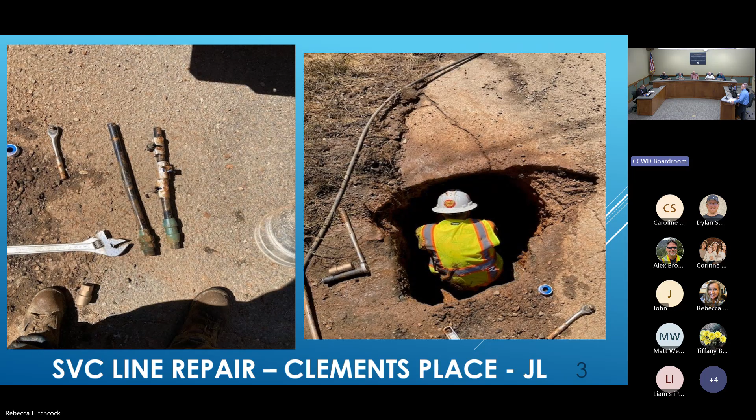You can see what they cut out in the image on the left. They actually cut out at the tap too - it was leaking at the tap. So they put a whole new tap saddle on and then run a new section of poly tube. That's what a new tap saddle looks like - you can see it on the main, the AC main there at the top of the screen. And this is kind of what the old tap looked like, just threaded right into that old AC pipe. So a lot of the time the threads, you need epoxy around the threads, will break.

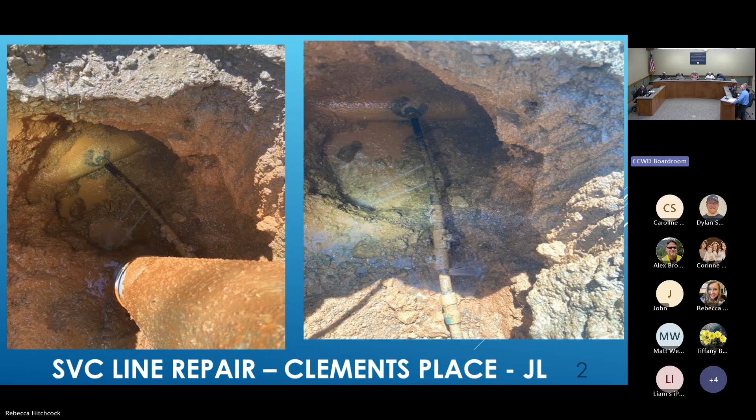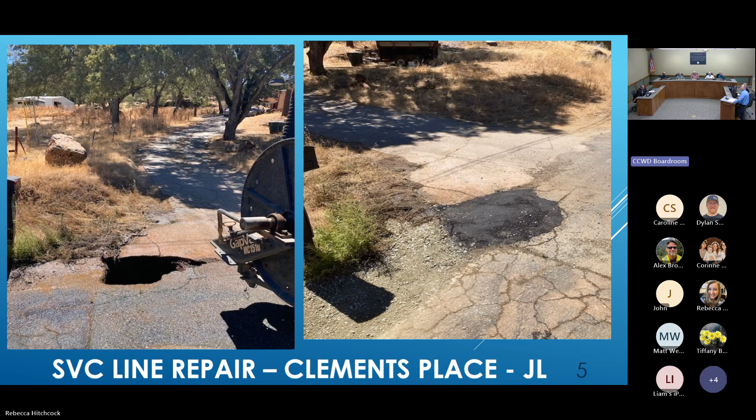So, just more of the same. I think the Jenny Lind crew had 45 repairs on mains and service lines in the month of August. You can see that's kind of the hole they're working in, in the image on the left, and then the backfill with the temporary asphalt in the image on the right.

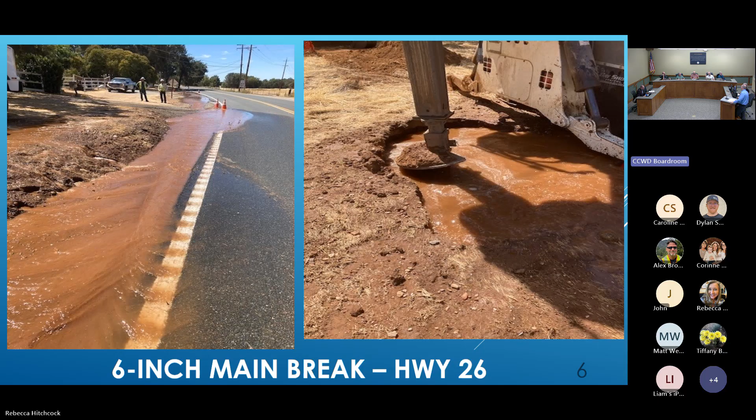This was a USA related to PG&E setting power poles off of Highway 26. Not a lot of water, but there's some - this auger bit bored into our 6-inch water main. So the challenge here is when our folks respond, is to not just completely shut that off and allow all that muddy water to flow back into the system. You really want to keep positive pressure until you can clean and expose the area and then get in there and make a repair.

So do you shut the water down a little bit? Yeah. So at the hole, where it's already kind of just boiling out, you minimize it so that you can overcome the water coming out of the hole with the vacuum truck - that's really what you want to do. So you can expose it, see what's going on, clean that area, and then put a full circle clamp, like in the image on the right, and avoid a boil water advisory.

So why would they be drilling anywhere near it? I mean, we've got good maps, and they've got metal detection. Well, we don't have good maps.

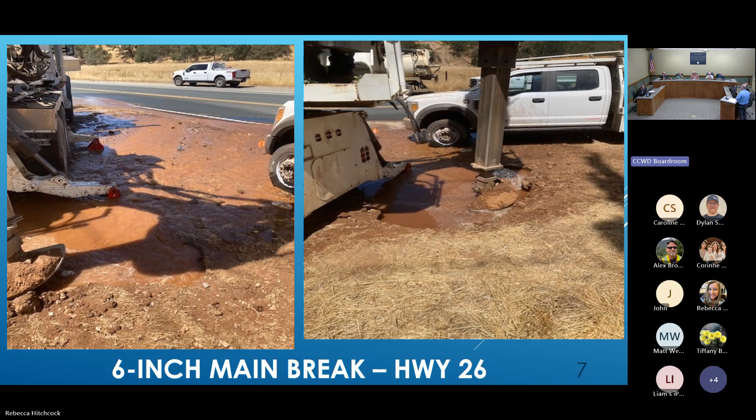Yeah, that's the challenge - it depends on the location, it could be the map, it could be a locate bust. This pipe can be very difficult to locate. This asbestos cement pipe, if it doesn't have a wire on it... I'm not sure if this was a USA locate bust on our end, but there's a lot of back and forth between PG&E and the utilities. If we mismark and tell them there's nothing right there, go ahead and dig, and if they hit it, it's on us to repair it. If we mark it and they hit it, then there's a little back and forth that goes on there.

PG&E usually has a minder on the job to help account for this work, and the ops folks here are up to speed on what happens. But there's so much work going on that invariably CCWD comes out ahead at the end of the month. At the end of the day, can you still see those marks? It depends - unless they took the asphalt out, unless it's just gone. Some of those USAs are what we call remarks - we need you to come back now, we've done a bunch of work, now we don't know where anything is anymore, can you come back and mark it again? So that'll happen.

Damon, I have a question - you call that a concrete pipe, is that what most people would refer to as transite? That is, yeah, I believe AC, some folks call that transite. But how widespread is that material used? I'd say about 75 to 80% of our systems are this pipe, AC transite, throughout the county. The rest, 20 to 25%, would be C900, plastic, PVC, ductile iron, some steel - not a lot of that left anymore.

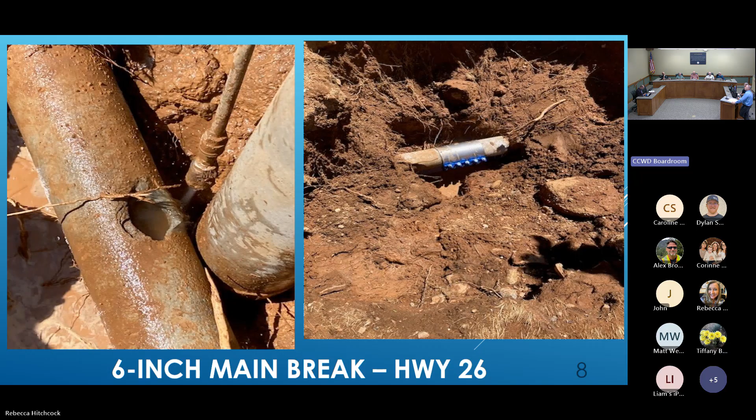So we have an earthquake here - is that stuff likely to crack and rupture in multiple places? Excellent question. I can show you, actually not even an earthquake - when the soil changes, like expansion and contraction, when the humidity or water content in soil changes, usually in springtime or fall, we'll get on AC pipe what's called a shear break. The ground will shift and it'll crack in a perfect circle around the pipe. It's a quick repair, but we usually see that when the conditions of the soil change. If you imagine an earthquake of some magnitude, we'd have a lot of breaks for sure.

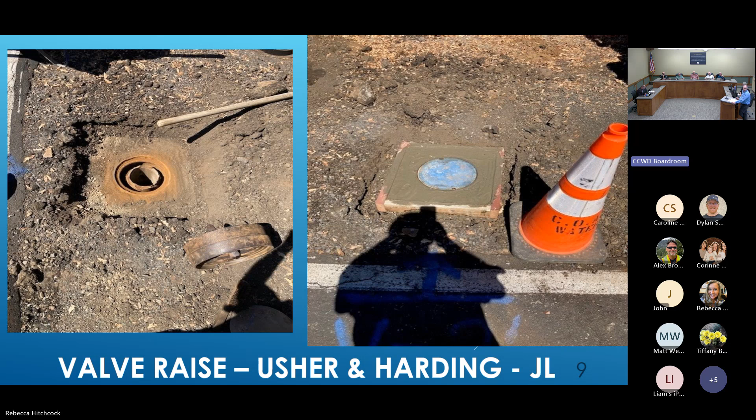Valve raise - we talk about this monthly. It's always a good idea when you find a buried valve to bring it up to grade, kind of like part of the conversation Kevin was talking about with paving. It's always a challenge when it comes to paving - if we're not on the ball and not locating our valves, and there's not a conversation about who's got the grade rings and who's got the valve lid, we will run into situations where they can be buried.

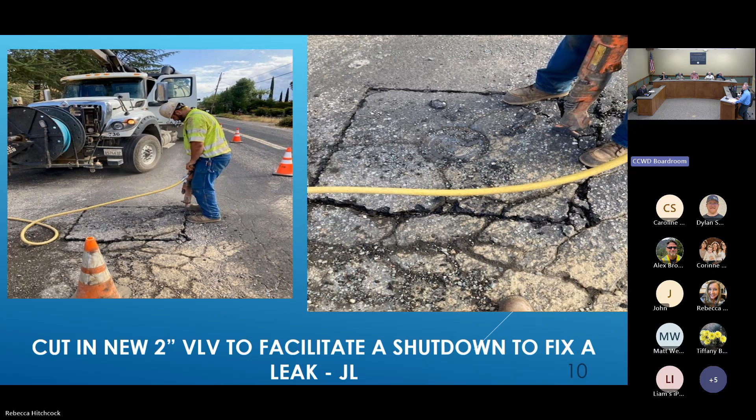This is an interesting one - we had to cut in and replace a valve so we could shut a water line off to fix a leak. So here folks are cutting into the asphalt. You can see, if there was a USA here, how - and that asphalt is in really good condition, I'm kidding - it could just disappear after the work takes place, and you have to get in there and redo the USA marks. And so here we are.

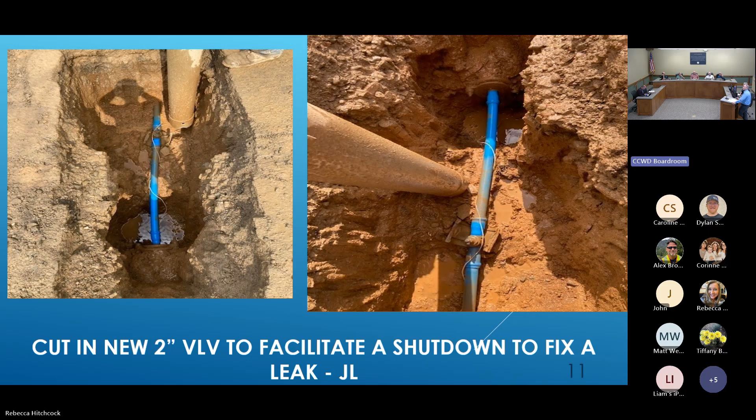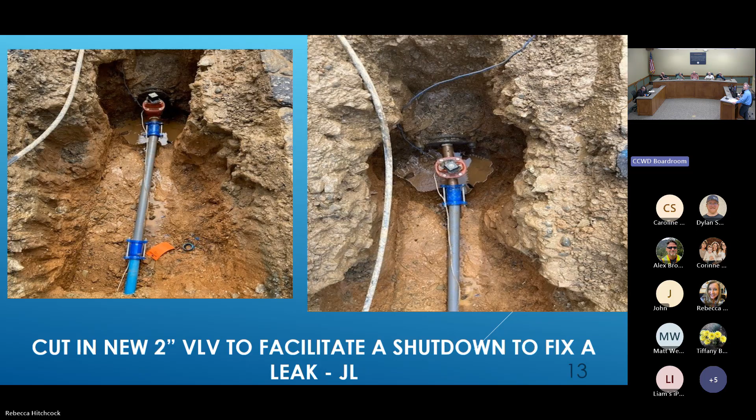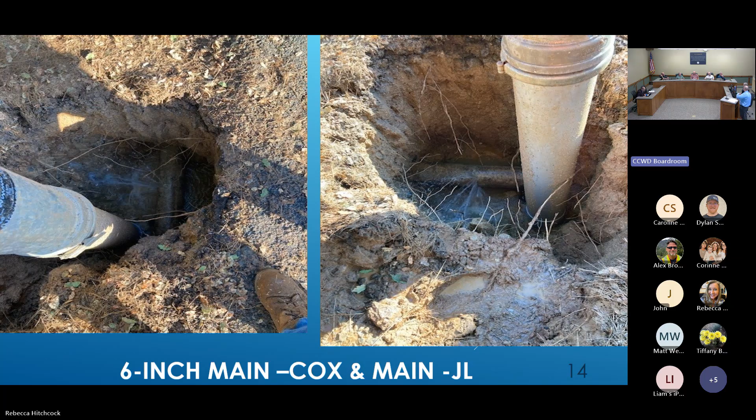So this is that shear break I was talking about - the soil just changed here and that pipe broke. In the image on the right you can see water spraying out. It's just like this perfect circle around the pipe, and usually those are repaired with a full circle clamp.

This is an interesting one. A hand dig repair on a service line going up a hill. It's kind of hard to see in the image on the left, but our operator is laying down on the embankment, pulling out old sacks of concrete that were placed on top of the service line to keep it stable, so we could then get in there and replace the service. Those are the old sacks of concrete laying at the base of the hill, so he can make the repair.

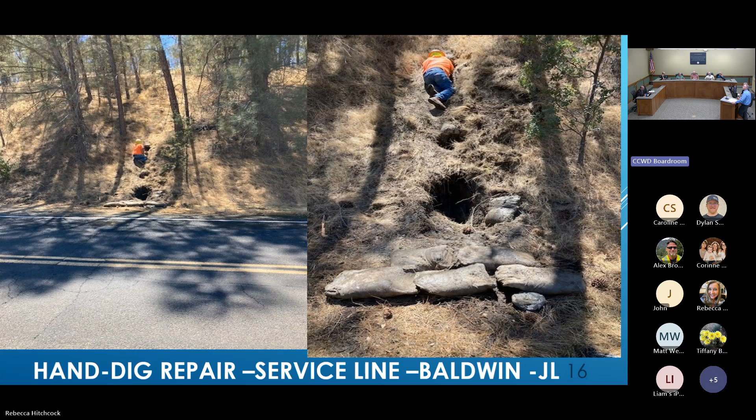Does he have to see a chiropractor afterwards? Probably, yeah. Sometimes you just need a hug. Oh, you're a good man, especially in some muddy stuff like this, right?

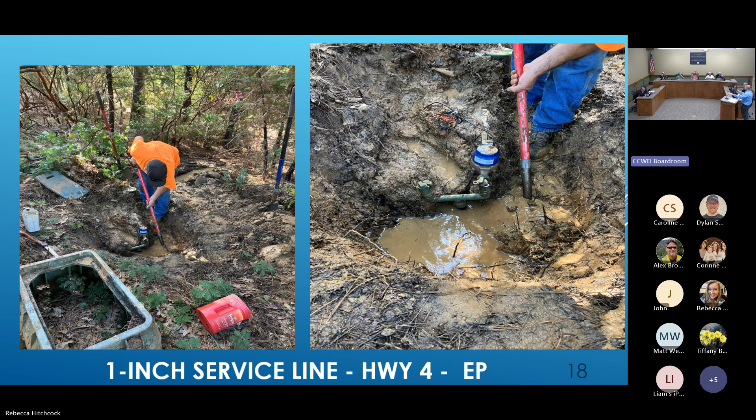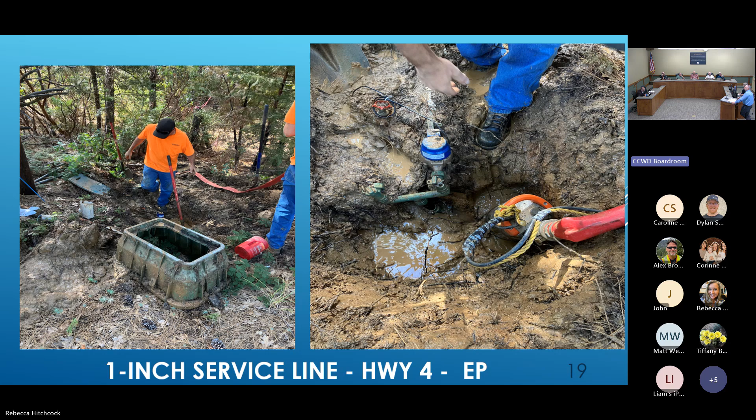So this is a 1 inch service line repair. This gives you a window, kind of hard to see, into how a lot of our services are plumbed. One service lateral coming from the main, feeding a manifold that feeds 2 water meters, which you can kind of see in the image on the right. One of these sprung a leak on the bottom of what's called the curb stop, so folks get in there, tear everything out, fix what has to be fixed, and then put everything back.

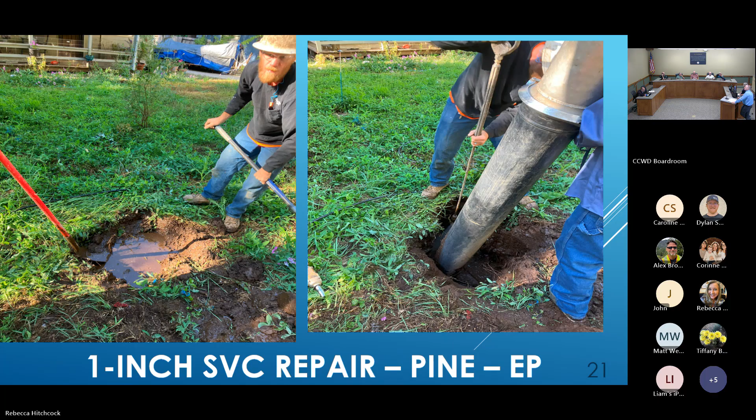Here's another 1-inch service. Just a pretty straightforward full circle clamp repair on this 1-inch service up on Ebbetts Pass.

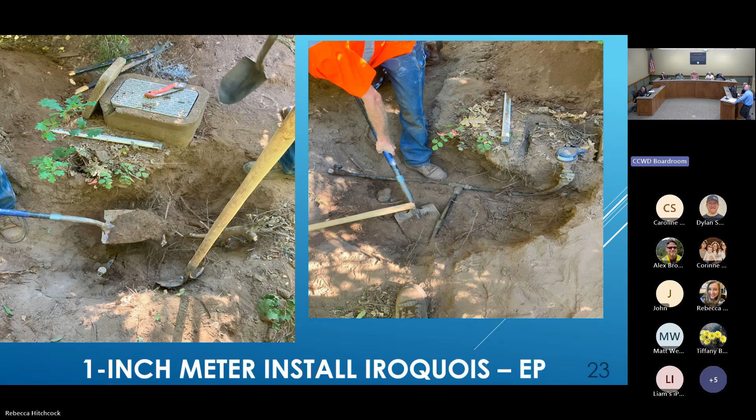Here's a 1-inch meter install. Here you go, another different manifold. This one is actually with just a poly tube and a T. The image on the right shows 2 lines going to 2 meter boxes and 2 water meters. Our folks will get in there and set the meters, clean it all, and make it nice, landscaped if you will. That's the end result of the image on the right.

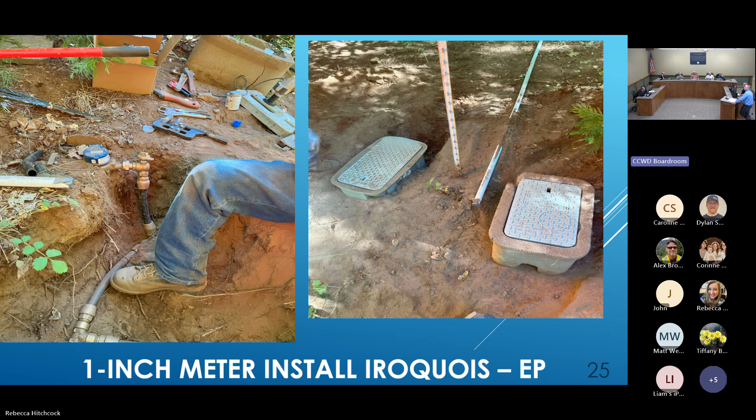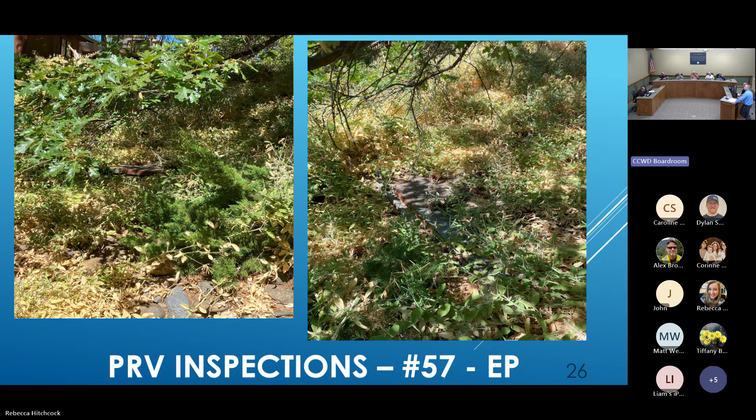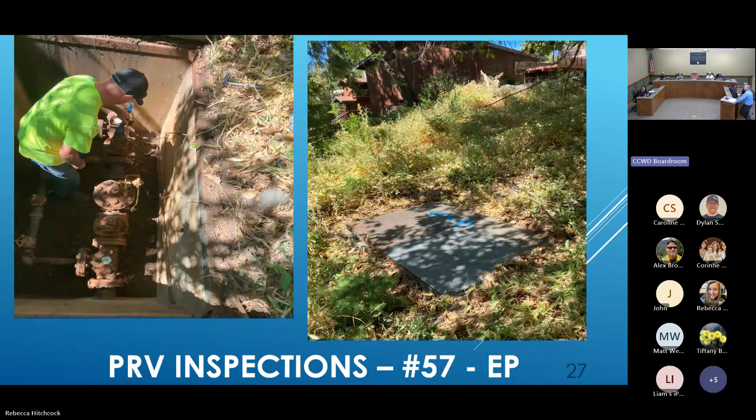PRV inspections - we talk about how variable the pressure is up on Ebbetts Pass and the number of pressure reducing valves we have, in the hundreds. This one, as you can see in this image on the left, is pretty old, and these are the kind of PRVs we're hoping we can replace, ideally with some of the grant funds from the AMI project. That would let us optimize the pressure throughout the systems, which results in a reduction in energy use and more accurate water supply to the meters. Folks get in there and do maintenance on these PRVs. It's critical - if they fail, you send high pressure to the community or residents, resulting in a lot of issues for the homeowner. This work happened actually in September.

Interestingly, this past month of August, there was a lot of use on the slurry line. Two customers were using a heck of a lot of water, and they were noticing water quality issues - a lot of turbid water, and the pressure would fluctuate. We went out and investigated, and the water coming in from the canal was great. We have a pressure reducing station on that pipeline, and there were no issues there.

We're pretty confident that the amount of draw they were taking at any point in time, they were actually almost kind of fighting each other, and it's something we're going to need to pay attention to in the future. They each have 1-inch, 1.5-inch connections and are some distance from each other, but the speed at which they pull water affects how the pressure reducing valve operates, which can cause that water line to fluctuate. So dirt can become stirred up in the bottom of the pipe, and they can pull it into their water trucks.

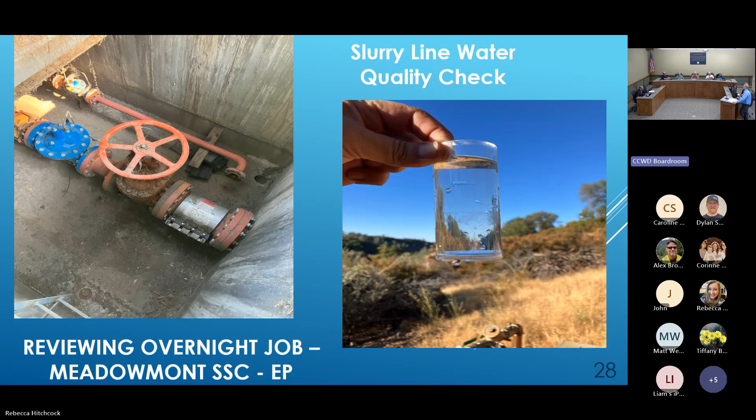That makes sense. And as you guys know, when you're in the ground or dealing with gas, the metal's going to behave differently. I have some pictures of that here in an upcoming work order slide.

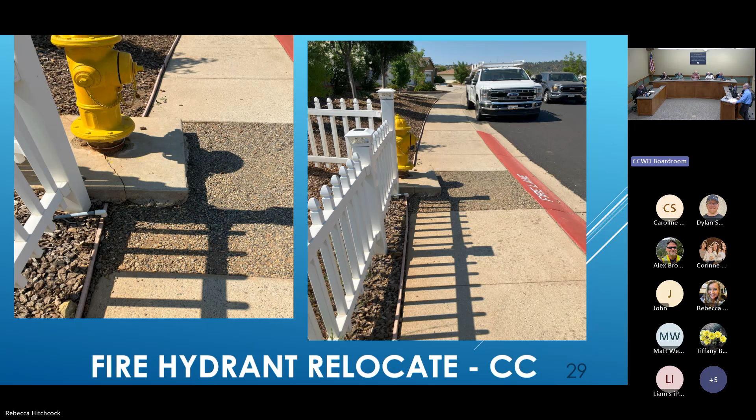Our guys identified this and worked with the HOA, Copper Cove HOA. The property owner who owns that white fence was great to work with, because there needed to be a little bit of relocation. Our construction crew came in, broke that up, and then poured the rest of the sidewalk and pushed the fire hydrant up onto the embankment just a little bit. The fire department still has full access right up to that fire hydrant, and the fence was moved to improve the system in general for everybody.

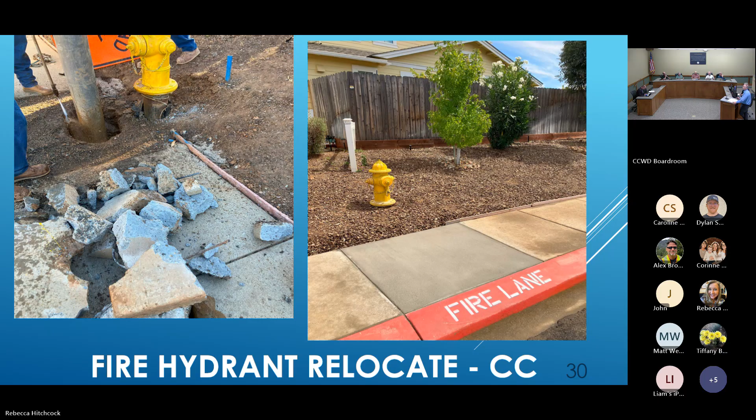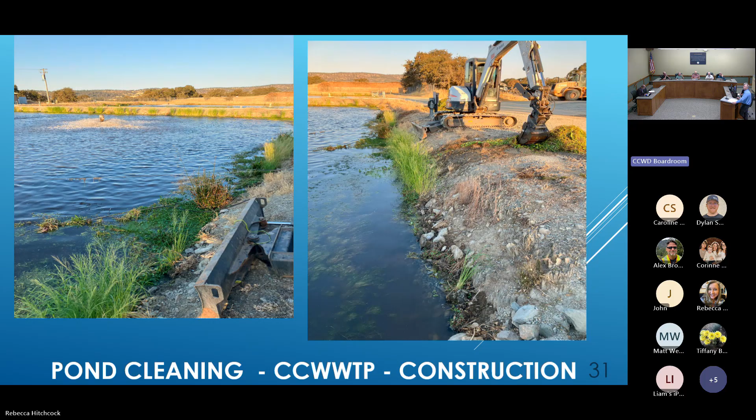This is interesting. The construction crew worked to remove a bunch of plant matter that just grows around the sewer pond, so this is housekeeping. The treatment operators really want to keep sewer ponds as clean as possible, so they'll work with the construction crew and bring out equipment like the mini excavator and haul all that off. Ultimately the ponds end up looking like ponds in the park, which is what you want, really sanitary. Hats off to the guys doing that work.

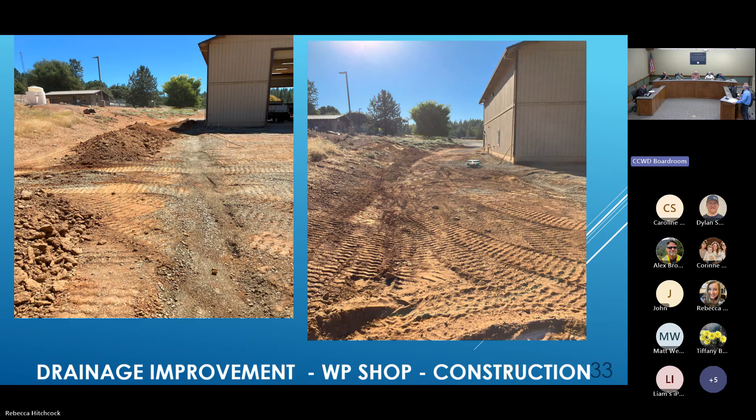This is improving the West Point shop. Not only were the guys improving the drainage at the shop, they covered it in base rock, and they also ran a water line to where we keep our base rock for leak repair. That's our backfill material when we fix one of these 60+ service lines, using class 2AB base rock. Now the folks in West Point have water they can use to spray down the base rock in the summertime and keep the dust down.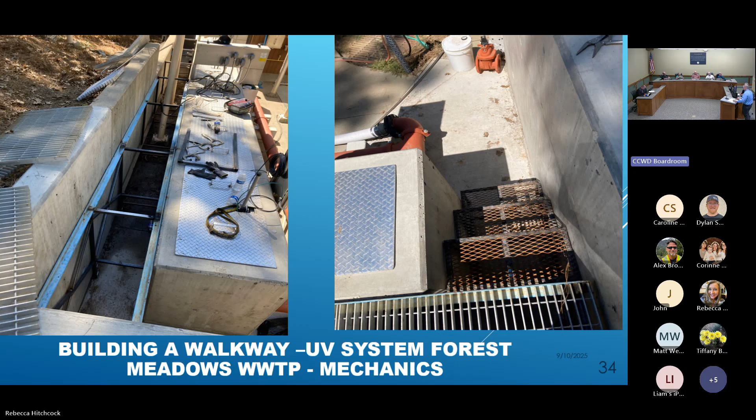Forest Meadows UV system disinfects the treated wastewater after it's flowed through the filters. There was a walkway in the image on the left where you could walk around that UV trough, which is full of water with ultraviolet light bulbs disinfecting the water as it flows underneath. The trough was kind of chest high to me, making it really hard to get over and pull out those UV bulb units - you have to use gantry cranes or some sort of crane. So the operators worked with the mechanics and built a walkway that you can run a crane on.

So the image on the right, you can now push a crane across the top of that and you can pull the bulbs up, use a hoist, do your work, and you're kind of at ground level with everything.

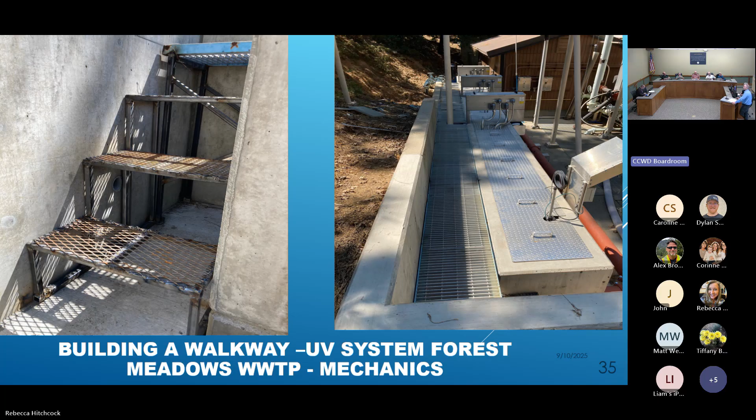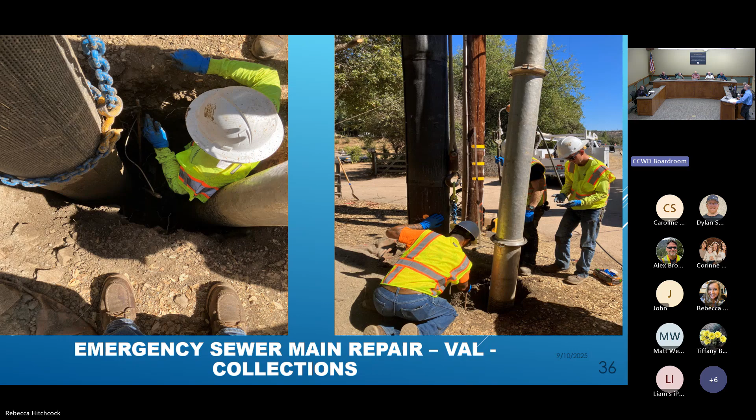This is Vallecito. The sewer lines are all over the map there, you can see that in the image on the right. It's pretty much been blasted by the auger from PG&E trying to get in there. And this is how close we were to that pole, they just set that pole. Look at the image on the left, the pole, the chain's still on it. So those guys are moving fast. Hats off to the county for working close to those guys.

John is a busy man over there. Some interesting ones from electrical, UPS.

This is our Acorn pump station. You guys may have heard of the Acorn pump station. This is the secondary pump from the middle fork of the Mokelumne River pump station, our secondary source of supply for the West Point water treatment plant. That's CPUD's water, that's correct. This pump station is on the Calaveras Band of Miwok Native Americans' property, and it boosts the pressure to get this water all the way to the plant or to the Bummerville Reservoir, either or.

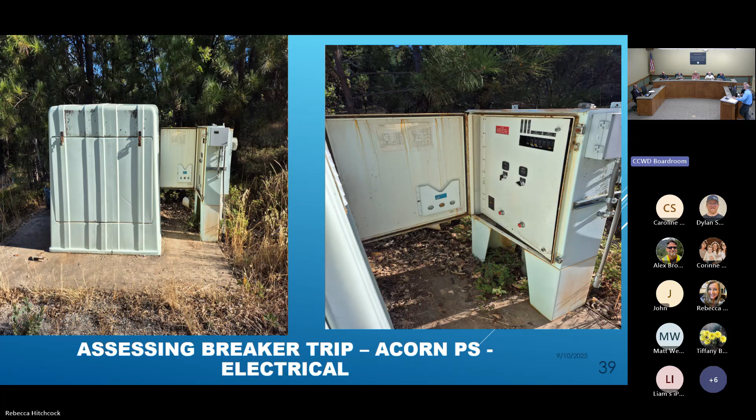So when the plant shuts off, these pumps still operate and push water to the reservoir. When the plant kicks on, it'll draw from the reservoir or the line, depending hydraulically on how it's configured. But it's quite an antiquated pump station, and this was a breaker trip, but invariably we had issues there. The engineering team and CCWD over the years has worked on projects to replace this whole conveyance system to improve it, so that work will continue.

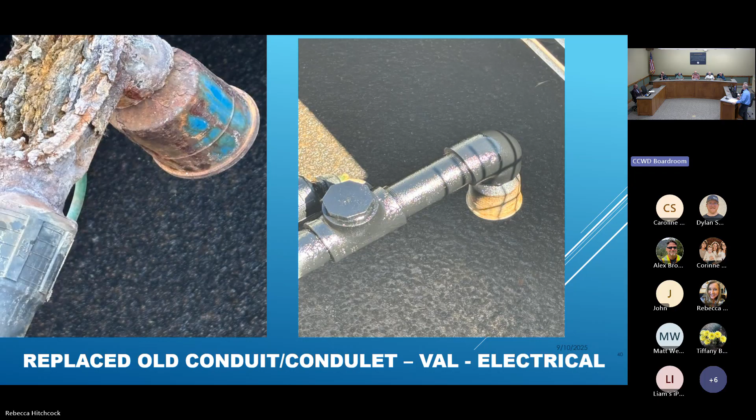We're getting really close to wrapping that project up.

So, SCADA system repair. The SCADA system is the interface between the treatment facility and the operator, and those computers have to work. Our instrumentation electrical techs are very adept at making sure they stay online and continue to work. So this is a battery replacement, and they can pull the motherboard out, put whatever it is they need to replace into it, put it back on, and kick it on, and you can interact with the treatment facility again.

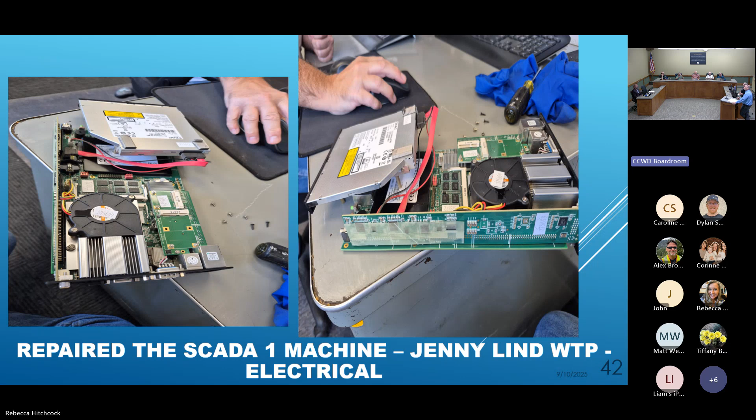So what redundancy do you have there? Do you have a backup? SCADA 2, yep. And then there's backups that happen on site, historian backups. So there's two machines, two systems, and then a backup that's backed up.

And just so everybody knows, disconnected from the internet. So these SCADA machines are not connected to the internet. They're connected to the system, to the treatment facility.

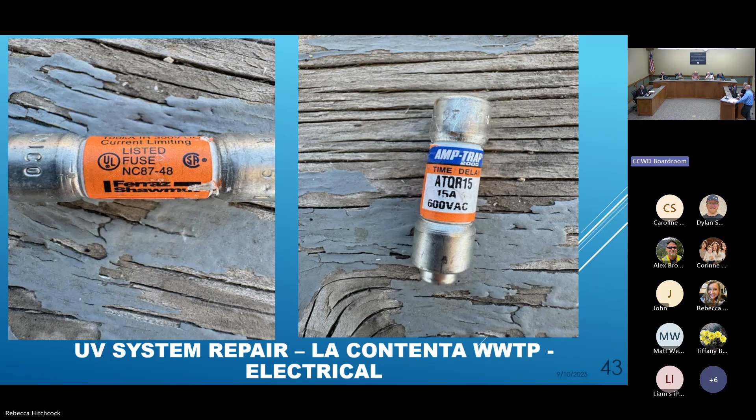UV system repair at La Contenta. So it can be as basic as a fuse, which there were fuses that needed to be replaced. It could also be as robust as basically the PLC essentially. So our folks keep some of this stuff on hand. The electricians have a lot of backup equipment, just in case equipment, particularly equipment that has a long lead time. They will hold on to a couple just in case.

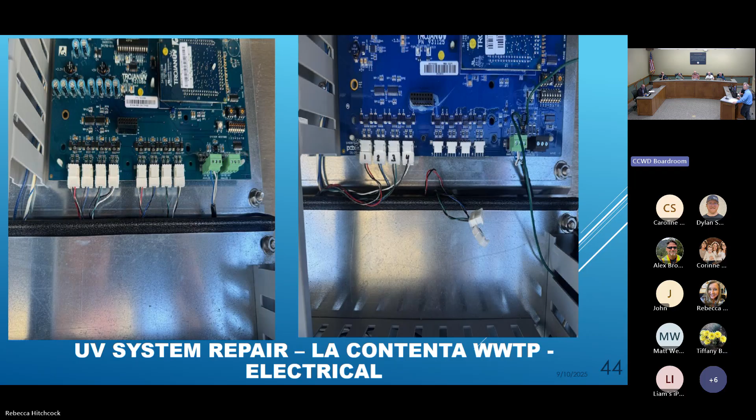And then I just wanted to touch upon what CCWD experienced last Tuesday morning. It started in the morning with the fires, the TCU lightning complex fires. It was interesting, it was like 4:30 or 5 in the morning, and it's summertime, so my wife thought she heard an explosion in downtown Jackson, and we were like, what is going on? What is that? And then we realized, oh, that's thunder. And then sure enough, as I'm driving in, my phone starts ringing, fires in people's backyards.

As you guys know, with the Watch Duty app, it's like an essential game changer. When we can pull up real time the weather, which is huge for us because then we don't have to get into the emergency operations center's hair at OES and ask has the weather turned. We can see what's going on. So that was really helpful for us, for CCWD in particular.